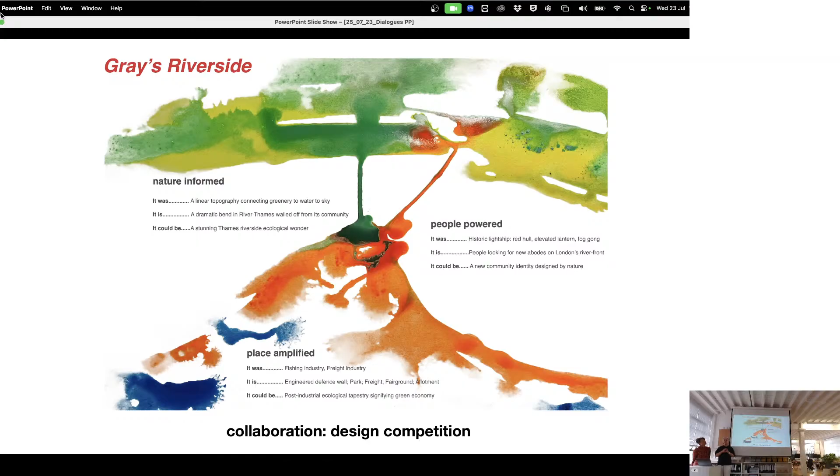And so we've rewritten the book many years later, after teaching at the AA. The book got us a job teaching at the AA, and there we were exploring nature very directly with the students and looking for stories. We share this process with a lot of people we do collaborations with, and I think they really enjoy using the process because it brings facets out of projects by looking at nature, people and place.

Thank you, Simon, for having us. So in this book, aside from the process which Mike described, we also added 5 case studies to demonstrate how that process works. So as Simon said, it's very, very difficult to rationalize a process. And in this book, it looks maybe a little bit neat, but the reality of it is actually much more organic, and there are a lot of U-turns.

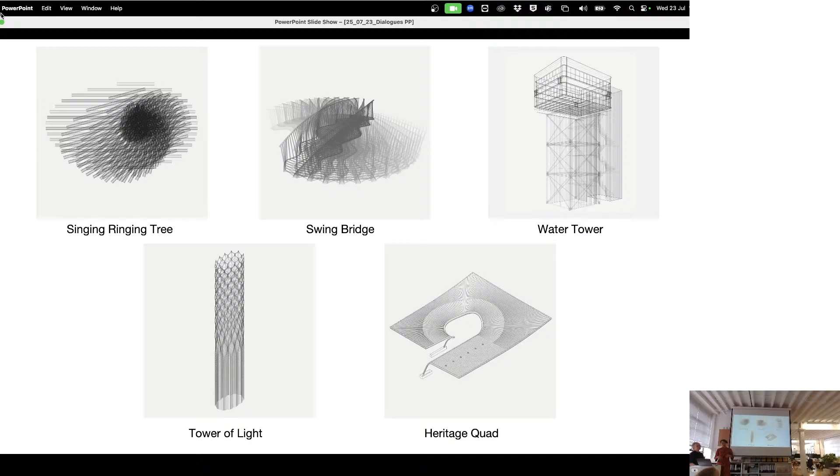And I suppose part of the motivation for doing this book is we feel architecture's really going through a very difficult patch right now with the convergence of challenges on many fronts, and sometimes we're all quite inhibited in almost a culture of fear, but also we all have architectural prejudices, and it's very difficult to think outside of our own limitations, and we almost forget architecture is an incredibly holistic and powerful tool for innovation.

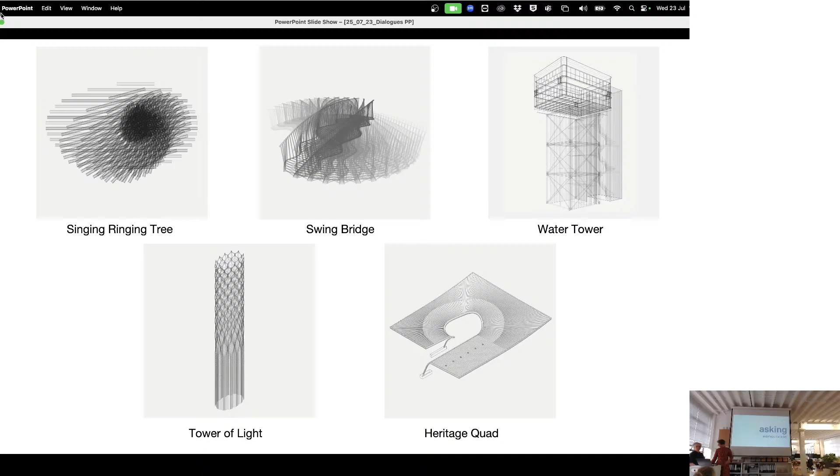So we want to use this opportunity to rethink the three facets of nature, people, place from first principles. And I hope we can show you how that works. So to show the process, hi Tony.

There's a seat here. So the first project is Singing Ringing Tree, but I'm going to show you the diagrams that demonstrate the beginning process, which is asking. So the site was disparagingly described to us as nothing but wind. And in the beginning, the first stage, asking, is all about words.

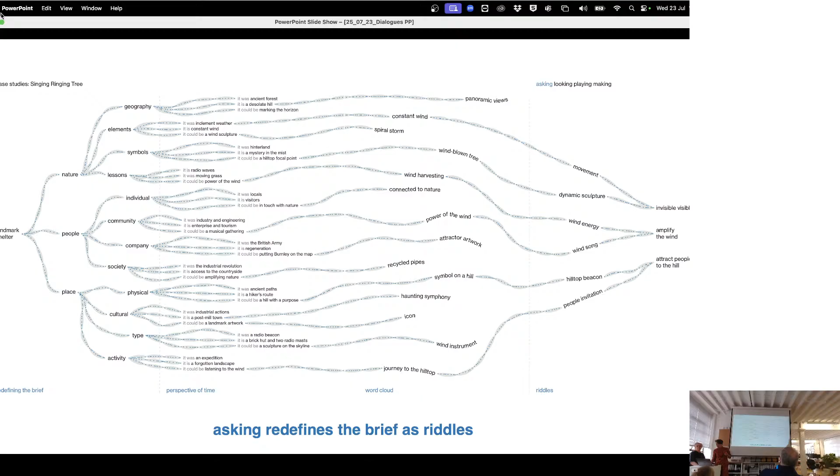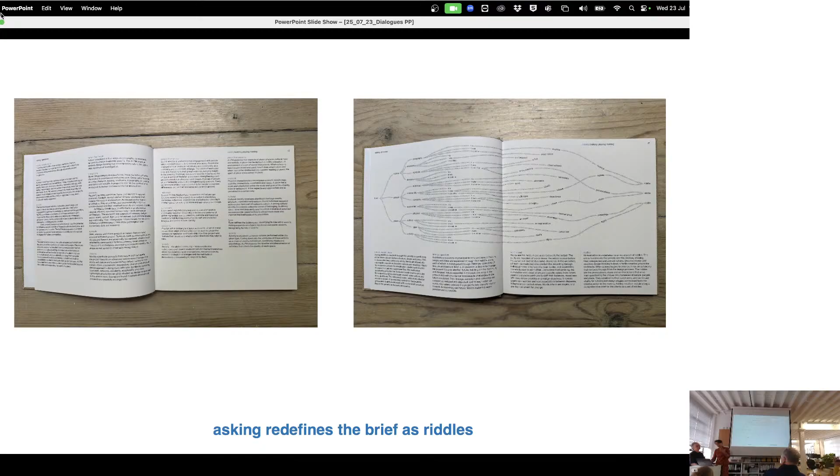We don't use images, we resist sketching, because chances are when you start drawing, it's what you know already or what you're very familiar with. And we all get into habits of what we want to do. So we use words, and it's almost like a kind of word association game. And the main aim is to redefine the brief as a set of riddles. And I'll explain what these storytelling tools do to this process.

So the brief is expanded in three pillars of nature, people, place. And then within each pillar, it's expanded in four ways. So for example, nature, we often see it as one scale or another. Here, we're looking at, in terms of geography, the natural setting of a place, the site, and the clues from everything that's non-human on the site, the geology and the biodiversity and so on.

The second scale is elements, so rain, sun, and wind. So increasingly we use them as resources, but they also can be integral to our design as a sort of animator. We all are familiar with the idea of using light, but rain and wind and other senses like sound and smell and touch can also be embedded into architecture. So we very deliberately think of what are the elements that we should look at.

And then symbols. I think it's a very natural instinct to connect to nature through symbols, through so many fables and stories. It is something that we found with our projects helps to unify the communities that we're working for, and it gives them a kind of new identity, and I don't think anyone argues with nature. They're rather universal, but they could also become incredibly specific and local. And so that's the beauty of symbols that come from nature.

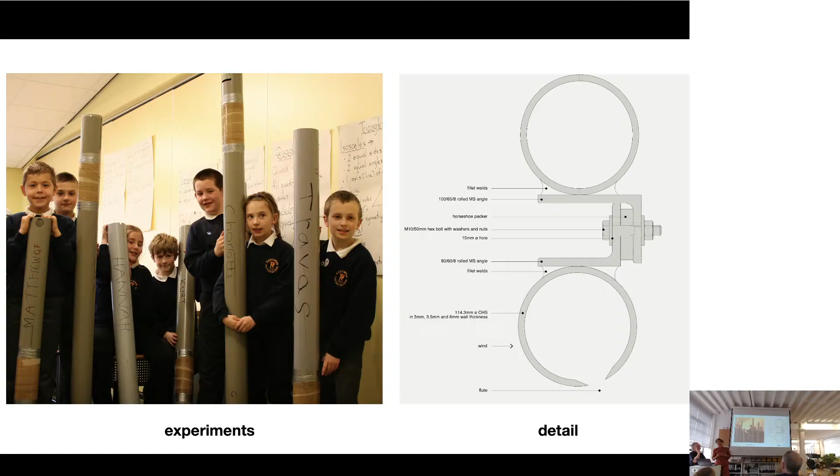So how to turn something that's really kind of despised or disliked into something different and transformative. So it's become, I think, a bit of an identity for Burnley on the top of the hill. And at one point, I remember, it went on pause for a long time. So what's not evident in the diagram in the book is that there was a long pause where the clients weren't sure they wanted to progress and so on.

And in the end, they came back and said, well, we did a flag flying contest and decided that it needed to be visible from the Sainsbury's car park in Burnley. To get the money off Sainsbury's. Is that a possibility? We said, oh, okay. So we knocked down a radio mast shed and propped it up on the rubble of that demolition, and managed to achieve it without building more of a sculpture.

And it's become adopted by the area. Our job was, as I said in the brief, to put Burnley on the map, and then the singing tree was put on the map as well. I think what's interesting, I feel it's almost implicit in every brief that a place needing regeneration or cohesion wants to be put on the map, in whatever measure. And whether you're Grosvenor Estate or a tiny village in the north of England, I think everyone wants to have a sort of voice and place on the world stage.

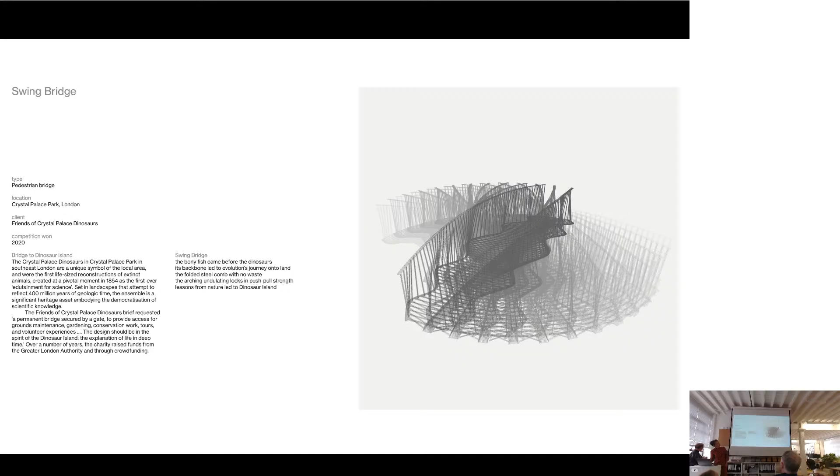So the second stage is looking. It's always where we set the architectural intent. And we're going to show the process through this project, Swing Bridge in Crystal Palace Park. The client body is a local group, The Friends of Crystal Palace Dinosaurs. So they kept saying, we need a bridge, because the dinosaurs are falling apart. These are astonishingly grade 1 listed structures that are falling apart, and no one really understood, or at least I didn't in the beginning, the significance of this.

So this is what it looks like in our office when we do the brainstorming. So the looking stage is now more kind of visually based. So we will look at graphs, for instance, with symmetry, wind data and so on. But here, looking at similar territories, and then we put them on the wall along with the words from asking, and we try to make connections and threads that lead us to a place we call the quest, which in a way is the architectural intent.

So here we took the riddles and then expanded it again through the perspectives of others. So in this case, through nature, people, place, but within each one, this could obviously be swapped with other types of specialists. If we didn't have a mythologist, for instance, in our team, we would role play. We would think as a mythologist would, or anthropologist, almost using other disciplines' tools to analyze the situation, to expand. And what we're looking for is a sort of unique and universal design intent.

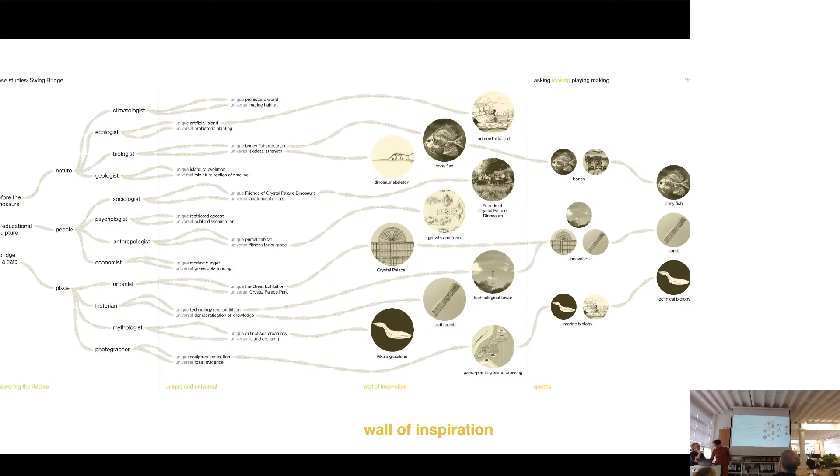So in this case, it's about a mixture of economy and communicating what this place was. So we learned that the dinosaur islands were laid out in geological time. So even in the way they created the islands and planted it, it was sort of the first example of edutainment, which means educational entertainment.

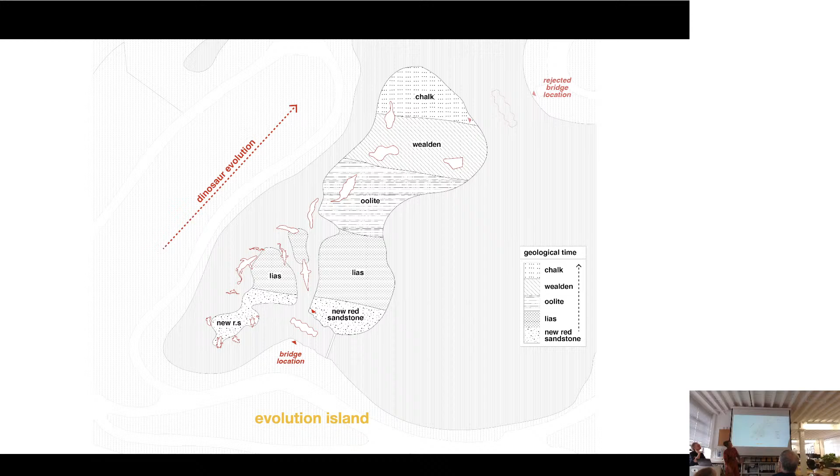So the Victorians wanted very much for physical things to communicate certain knowledge, and so planting, geology, and then those dinosaurs to teach people about evolutionary time. So we had a choice of two sites, and we chose this one because it was the beginning of time, it was before dinosaurs. And that gave us the clue to look at bony fish, and also the process of design we equated to a kind of evolution and adaptation.

And in this modeling of this quite short span bridge, maybe about 10 meters, we looked at different undulations to see what was the most optimal. So we tested many iterations to find what was the best visual and structural result. So this gave you a certain performance. We learned from how creatures move through the water in a very efficient way, and when the forces behave this way, you can make the plates super thin.

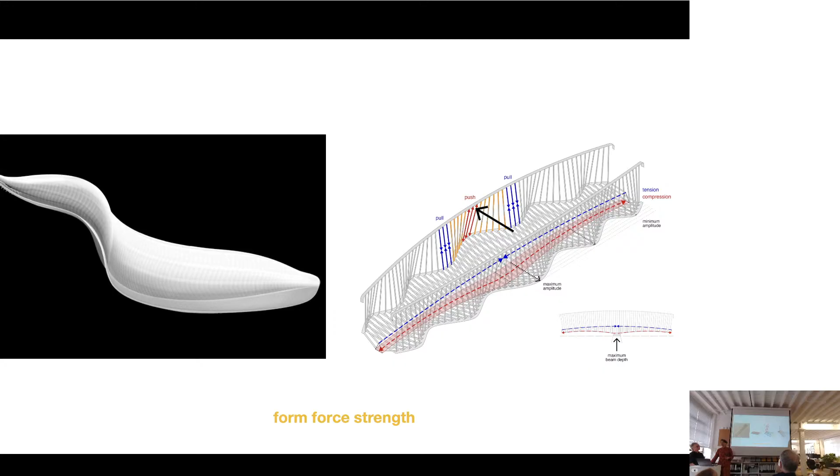In the back of our mind, always there was economy in place, because the group was raising money from the mayor's funding and also from their local community. So how are we going to make it really cheaply? We invented this method, which is taking one sheet of metal and laser cutting it, and bending one up to form the balustrade, keeping one straight to form the deck, and one going down to join the torsion beam. And that was a very material efficient and financially efficient way of making this.

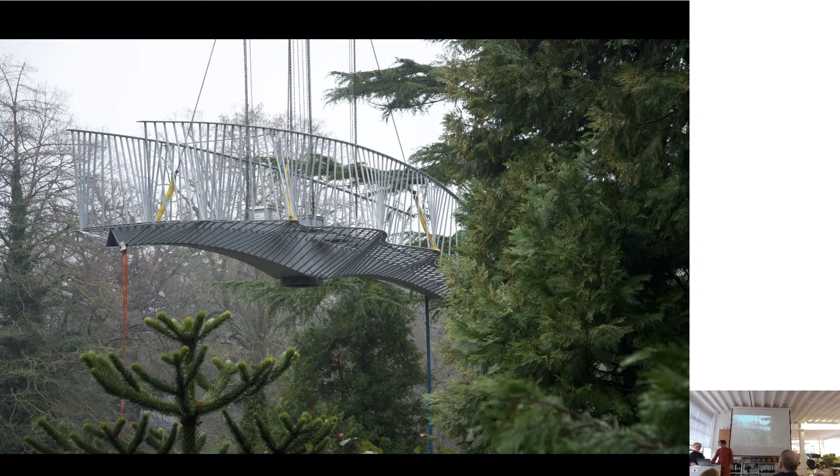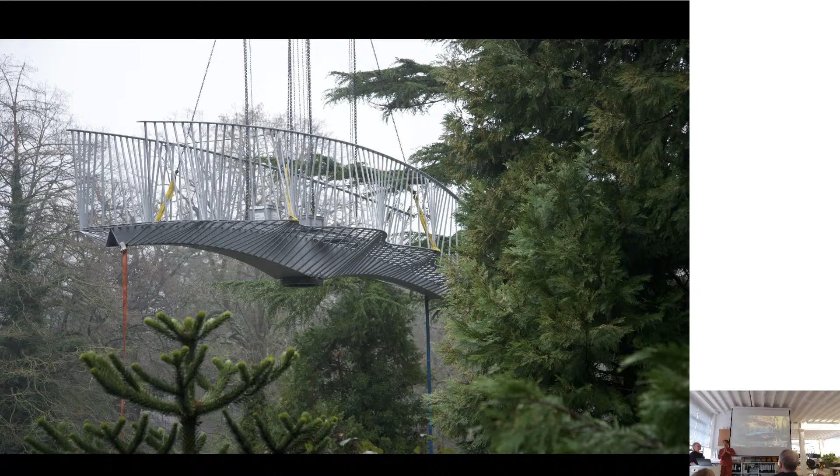So the third riddle to mention about this bridge is that it had to be a bridge, but also be a gate at some point, because they didn't want access to the islands all the time. So we tested a lot of alternatives, putting gates or lockable and even quite wild options, platforms that break up and become inaccessible. And the most simple option we came up with was this idea of the pivoting bridge. So normally it's parallel to the bank when not in use, and when needed, it's just a chain in the water and you just pull it across, like so.

So I'm going to hand you over to Mike, who's going to take you through playing and making, and through 3 projects, some of which you might have seen. So when we're playing, we're taking those quests. The quests are always varied, and they always give us a series of quests. So we're never chasing one thing, we're always chasing several things. So I'm going to show you that process in the case of the Tower of Light.

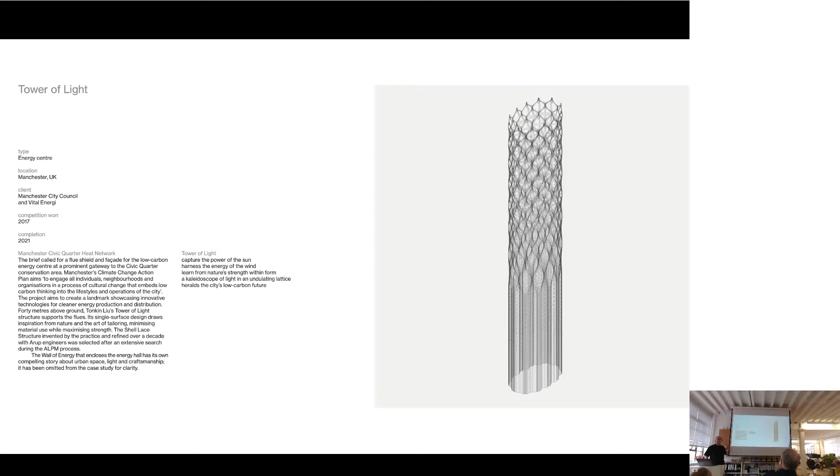So the Tower of Light is a flue to an energy centre in Manchester, but that flue is at the gateway to the Civic Quarter in Manchester, and so they wanted it to be a landmark. So I'm going to show you how we won the competition and how we got there. So the 3 quests we had were, we wanted to capture the natural energy of the rotation of the Earth, because we said that all energy on Earth is involved in rotation. The rotation of the planet gives us the winds, and the changing of the seasons, and the changing of the day. And in the man-made world, rotation gives us all our engines and our wheels. So rotation and energy are very much interlinked.

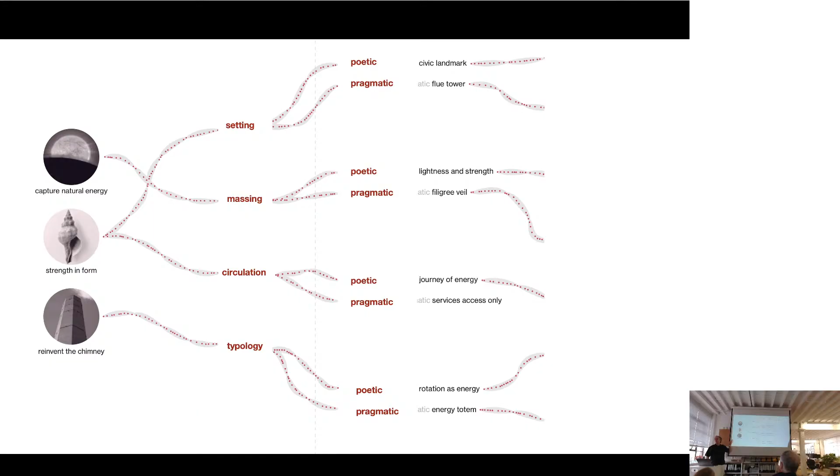We have a preference for strength in form, so we're very concerned by making things that have strength embodied in the way they're made and the form they have, so that they're completely efficient. As you saw in the swing bridge, where actually you couldn't change anything without it becoming less efficient. And then the other thing was, Manchester was a city of chimneys, and actually our job was to reinvent the chimney, basically. So we take those quests and we start to play, and we take each of these things, a setting, a mass, circulation and typology, and we balance between the poetic and the pragmatic.

And this kind of comes back to what we were saying 25 years ago. It's always a balance between poetic and pragmatic. And in the office, we always make models. We make lots and lots of models. So everyone's sitting around the table, it's done communally. And then those models get improved until they kind of go into Rhino.

When they go into Rhino, then we start to kind of amalgamate things, and things get selected, and we start to narrow it down. And eventually a kind of winner, they're called quests because there has to be a kind of defeat, and there has to be a kind of a victory. And the victory is the one that makes the most sense financially, artistically, and becomes an archetype, because basically we're looking for a symbol. We're looking for something that symbolises what the project's about, and we're not afraid for it to be a symbol. It's not a sign, it's a symbol.

So we get to the end, and we get an archetype. And in this case, it was the idea that we were going to make a kind of totem of energy. So to start with, this tower, it rises 40 metres off the floor, and when we went into the process, it was only 4 millimetres thick, and it has no other structure. So it's an incredibly strong structure, and that's because we learn from nature.

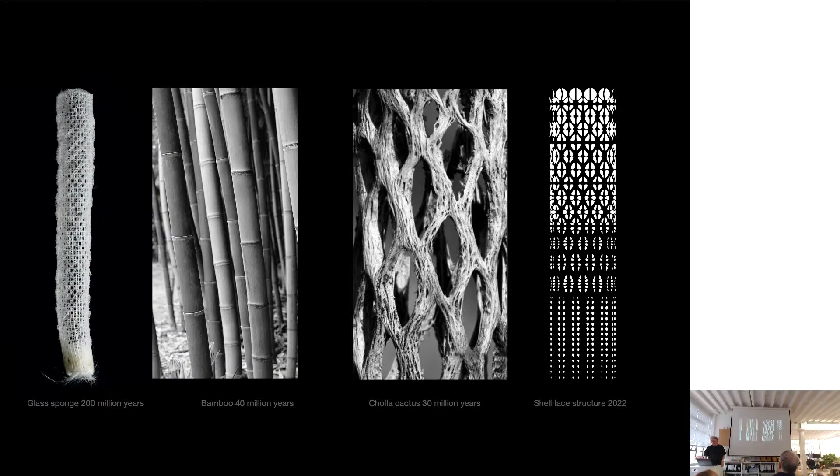A cactus in the desert is really interesting because it points at the sun, because cactuses are generally on the equator, so the cactus can get as big as it can because it just points directly at the sun, so it stays very, very cool, and this structure helps it do that. I mean, shell lace structure, well, that's something we invented in 2009. But we didn't think of using that straight away, to be honest.

We explored all sorts of things, and like Anna said, it's a kind of messy process, but we get a series of design alternatives, and we're quite serious about chasing each one. We were really looking at rotation and how we could get rotation into a system, but actually the one that was most successful was the one where we put rotation into a surface and we made a single surface structure.

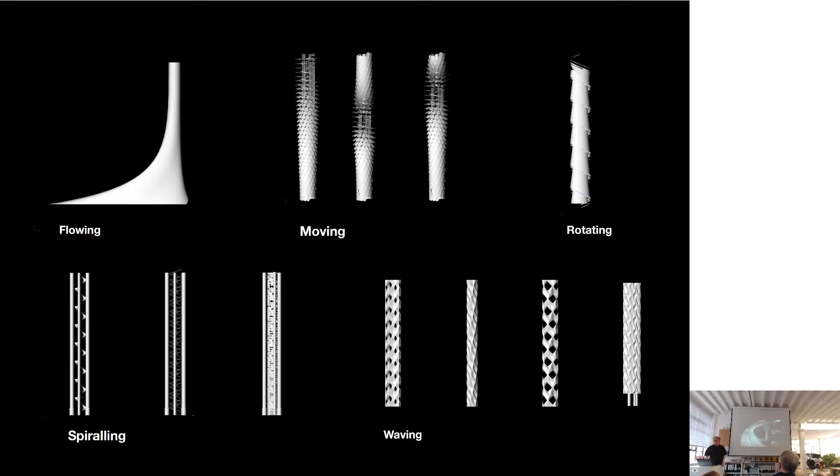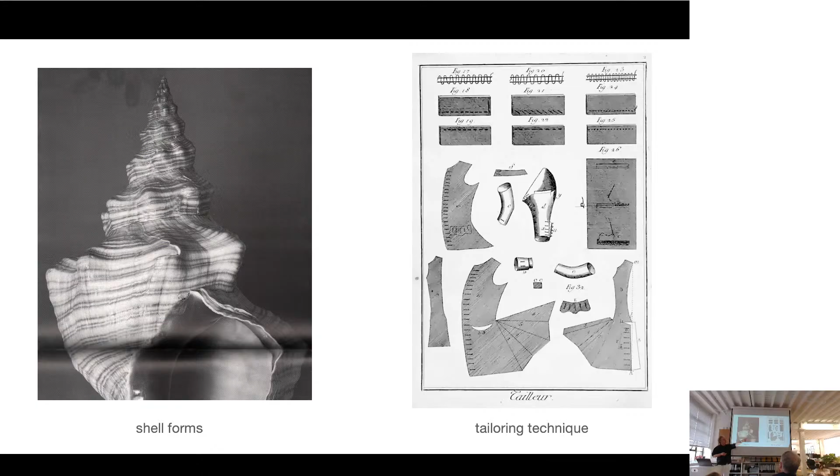So shell lace was something we'd kind of developed, as I said, at an exhibition at the RIBA, and it had its own kind of evolution, including the stent and other competitions we'd won. It has an efficiency to it because it has great strength in form, because when you tailor single surfaces and join them back together again, you lock in the strength.

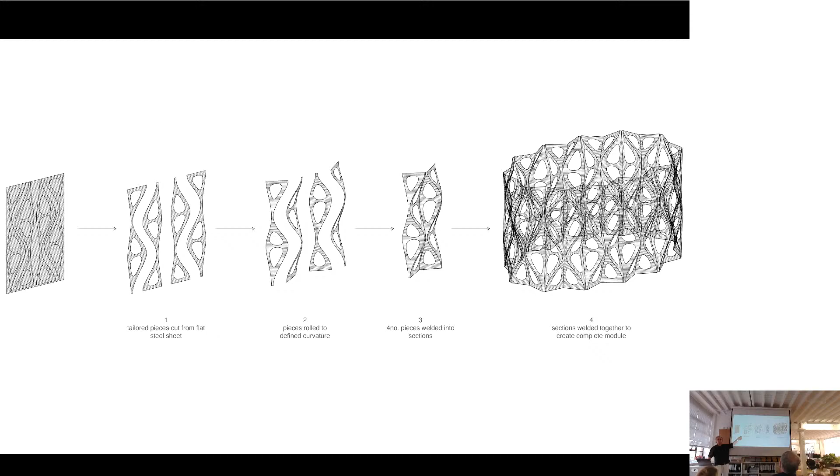So you take a sheet, you cut the sheet, you bend the sheet, and you weld it together. And when you weld them together, they can only go in one place, and once they're there, because they have other surfaces next to them, they can't move. So the strength is locked into the surface, and that's how we could get it down as thin as 4 millimeters.

And then we welded them together into a drum, and then the drum had all of the paraphernalia that was needed. So mirror polished stainless steel drums, and then all of this kind of made up a diaphragm, and at the bottom of these are gold stainless steel reflectors that are 2 millimeters. They're about the size of this, and they move in the wind. So when the wind blows, the light reflects off them, and you'll see how that works in a minute.

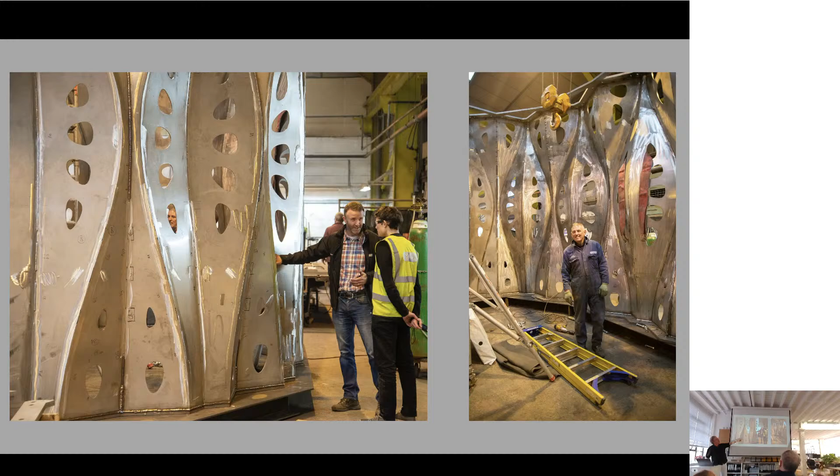So these are the drums being built. That's young Chris, who was the engineer from Arup, Chris Clark, and these two guys did the welding, and funnily enough, they're both called Phil. And this is the workshop, and I actually didn't see that. That was a picture taken by the contractor and sent to us before they went off to painting.

But you can see how they're sort of components, and the components get lighter as they go up, because as it rises, the wind speed increases, and as the wind speed increases, the bigger you make the perforation, the less the structural role, it makes more sense. You take more of the structure away, and it makes the structure lighter.

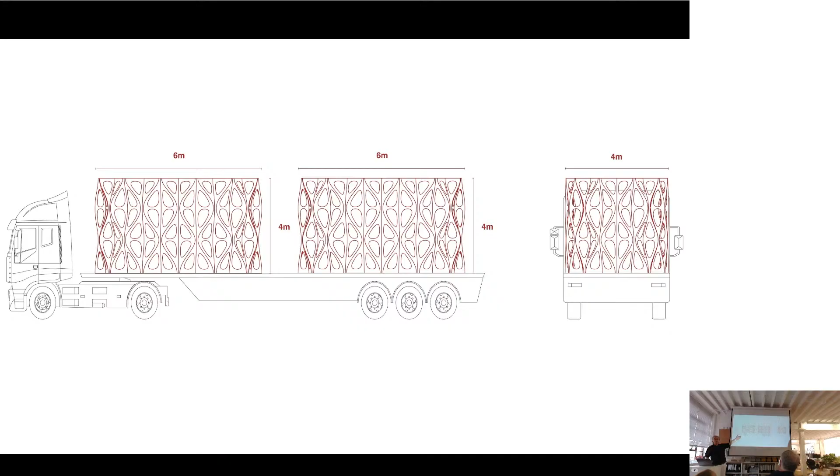In essence, the drums are put onto a lorry, and we designed it so that you could get 2 drums onto one lorry, and it was still fitted within the kind of design that meant you didn't have to have road closures. You'll see how a rotation works later.

When we won the competition, they then said, that's great, but we want you to do the same thing for the energy centre itself. So, in a rare case, they doubled the budget and gave us more money to do the base of the energy centre, and they said, we want you to make a statement about energy here. So here we talked about the energy of the land, not the energy of the sky, and we showed them pictures of...

What are they called, Camber Sands, where the wind and the waves have made these beautiful patterns of energy left imprinted in the sand, and we tried to kind of replicate that.

The stainless steel top drum was built by a company in Bolton called Shulton's, and we wanted this to be built locally, so we went directly to Darwen Terracotta, and Darwen Terracotta told us something quite interesting. They said that company started by making Belfast sinks, and they said, if you make it the size of a Belfast sink, you'll pay less money for putting it onto the wall. If you make it the weight of a Belfast sink, 2 men can carry it, and actually that's the optimum material. And if you make it the colour of a Belfast sink, that's the cheapest glaze.

So with those things, and they told us one more fact: if you've used the mould 25 times, the mould's finished, and you need to make a remould. We said, well, can the mould change? And they said, you can change the mould as many times as you like, as long as we can use it 25 times. So we took that amount, and there were 1,300 tiles, and we divided it around the height.

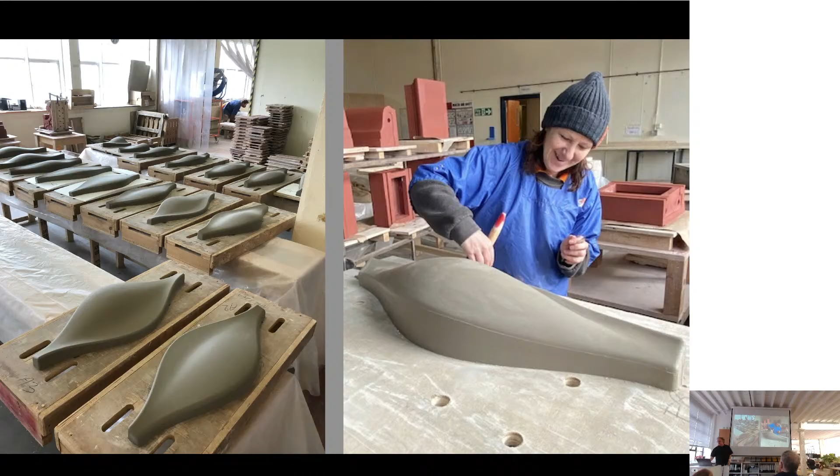So that actually we could make the tiles undulate. What we could actually do was bring that sort of Camber Sands undulation into the changing profile of the sand. So each one is made in a slip cast. They're then finished by hand, and then they get glazed, and then they end up on the wall.

In Pride we also change it so it's in different colours, and for the Heart Foundation we change it red. And we didn't want them to change it whether Manchester City or Manchester United had won - we said that was off the cards. It would have been blue most of the time.

So, making - I'm going to show you the water tower just because it's a kind of nitty-gritty project in a historical setting. Castle Acre is a really fascinating village. It's quite small, but it has 3 ruins: a Norman castle, the best one in Britain, a priory which is actually really beautiful, and a bailey gate through which you enter the village - quite a rare thing to survive.

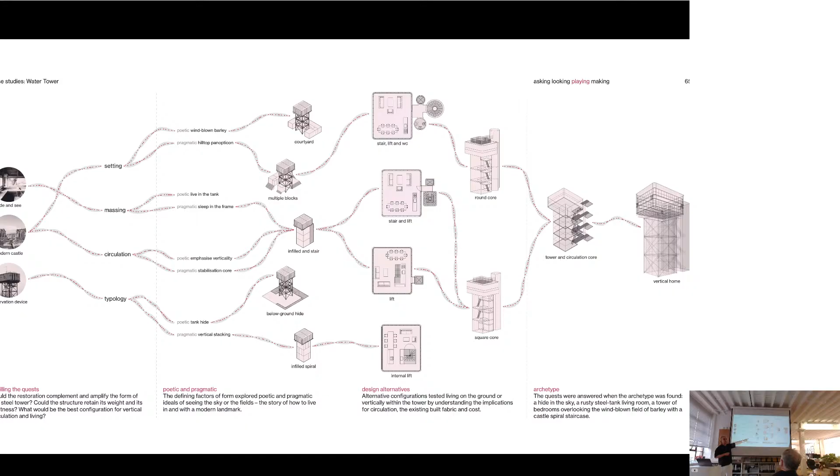So here's the process. I won't go into it too much, but you can see we do the poetic and pragmatic, and we did a whole series of alternatives, and it gave a series of variants until we arrive on one, and actually have to go to the QS and persuade Dennis he needs to spend a little bit more money, because otherwise he has to go for some of these other options he didn't really want. And actually it made the most sense, because we kind of maximise the structure.

And then when it comes to making, we take those first 4, setting, mass, circulation and typology. I'll explain that a little bit more with the York project. And then after that we go through structure, service, enclosure and apertures. And each one of those can be different in a building. And by separating the building out into those fundamental components, you can make a kind of an artistic agenda for each part of a building separately. And I'm going to explain that a bit more carefully here.

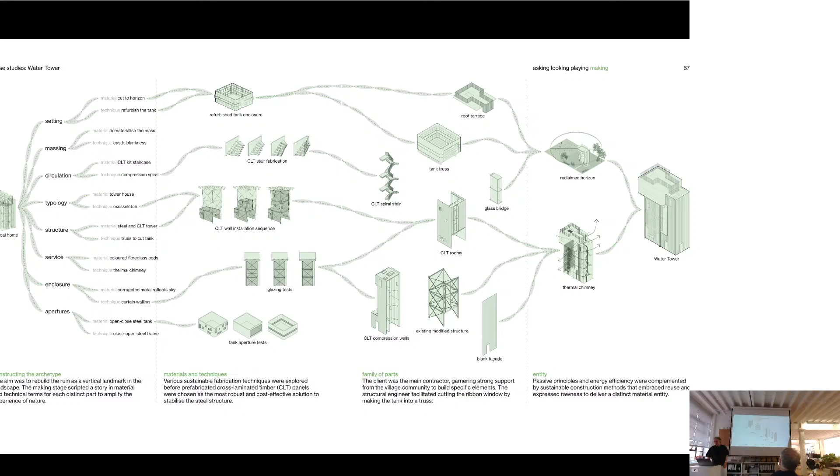So here we are, kind of family of parts. So we had the tank, the frame, the bridge and the stair. And I'm going to explain how each one, in our aim, was to take you closer to nature. So the tank was always full of water. So we said, let's make a horizontal cut.

Dennis wanted to cut huge windows in the side like everybody in a water tower does. And we said, no, don't do that, that's too Kevin McCloud. So let's just make a slit. And let's just make the slit so when you sit down you see the view, and when you stand up you see the view. And what you'll do is you'll just bring the horizon completely into the tank. And actually that was a much better thing to do.

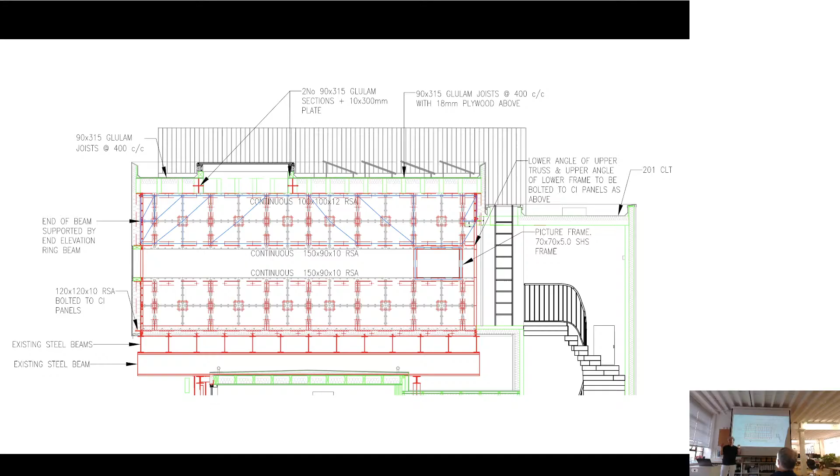And we did that with the help of Mervyn Rodriguez, who was a brilliant engineer, and he said we could do it by turning the skin that was already there into a truss, just by putting a frame on the outside of it, and by using the window frames that were next to the Velfac windows to bear the structural load. So a minimal structure.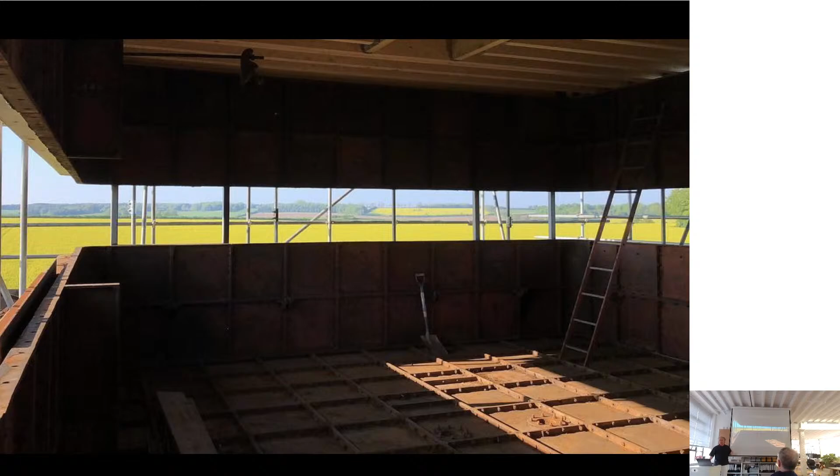So Dennis and his son, which son's that? Not sure. Harry, I think. Well, Harry, that's it, yeah. So with a sledgehammer in the morning, they undid the bolts and they knocked out the first panel. And by the evening, they'd gone all the way around with a sledgehammer and knocked all the panels out. And Dennis said it was a very satisfying day, absolutely exhausted. But in doing so, they revealed the horizon. And that was the intent.

What I pointed out to him is that actually once you make a slit like this, it's very easy for you to get glare unless you bring some light into the middle. So we persuaded them that we needed to have a skylight because that got cut out of the budget and we had to put it back in, otherwise the light wouldn't be even. And what we did is we surrounded that skylight by mirrors on 4 sides, so that it doesn't matter where the sun is, the sun would always enter the space. And then we put a flat glass skylight on the top of it.

And then Dennis made this film. This is the sky moving past, slightly speeded up in the mirrors that surround it. And at night there's a light around that as well. So that balances out the light in the space. And what happens when the sun moves around the building is that light's constantly changing. And when it rains, the water lands on top of it and the light comes through the water, and you get these water patterns that move throughout the building too.

So environmentally, you can see that this is a separate environmental zone here. We couldn't go into this structure here. So this is environmentally one zone and this is another zone. So I'm going to tell you how the tank works.

So the frame is incredibly slender. These are only 150 by 150s. They're steel. We had to fireproof them, and then we put the plan inside them. So we put a bedroom on each floor, and a bathroom and a bit of a wardrobe space, and on top of that a mezzanine because they were like cube-like spaces, and then at the back we put the staircase.

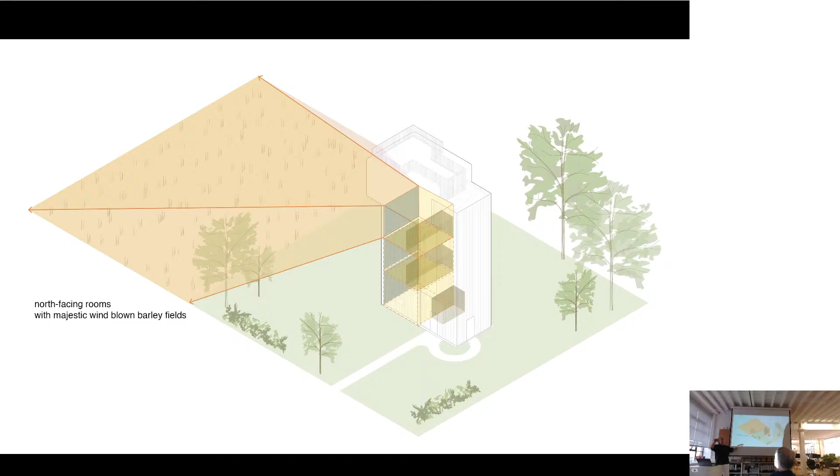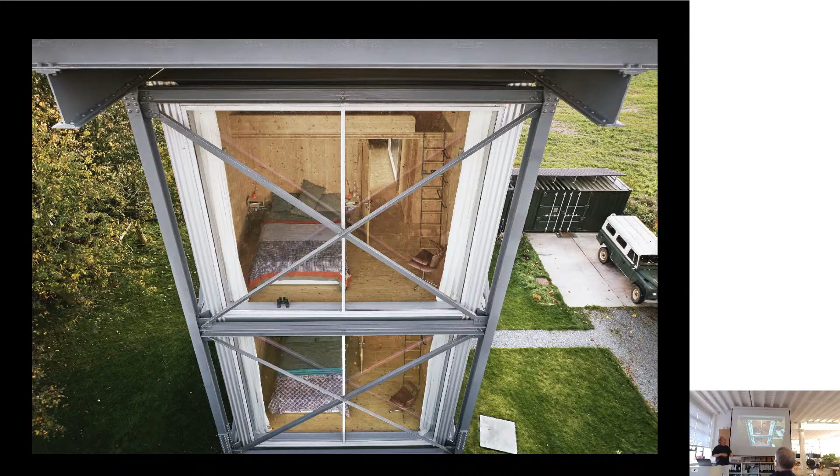So we made the rooms barley coloured by making them out of CLT, so you're in these CLT rooms that look out onto the barley coloured landscape. And that's what it looks like at night - the light pollution goes just into the field, and the village is kind of behind it. And this is what the rooms are like.

There's a low level window on one side and a high level window on the other. In the morning, the high level window makes a square sun on this side as the sun rises, and it moves across the room while you're looking out onto the barley field.

The skin isn't galvanised wriggly tin, it's zinc anodised wriggly tin, and it doesn't go dull - it stays super shiny, so the building reflects whatever the light conditions are. We planted Boston ivy on it, so eventually this building will become like the ruins down in Castle Acre, kind of going back into the landscape. And there it is reflecting the sun.

Dennis said he was called one night by someone who thought the tower was on fire, because it was reflecting back the red of the sunset, and then they realised it was just reflecting the light. Maybe the most important thing is the stair.

Anna and I have travelled a lot, and one of the places we travelled was Yemen. There, the stairs are always used as kind of thermal chimneys, which is how they keep those 8-storey buildings cool. So we used the stair here as a thermal chimney, with very little openings in it, letting in 2 doors at the bottom for cold air, which can flush the air out of the rooms as it rises, by keeping the ceilings high.

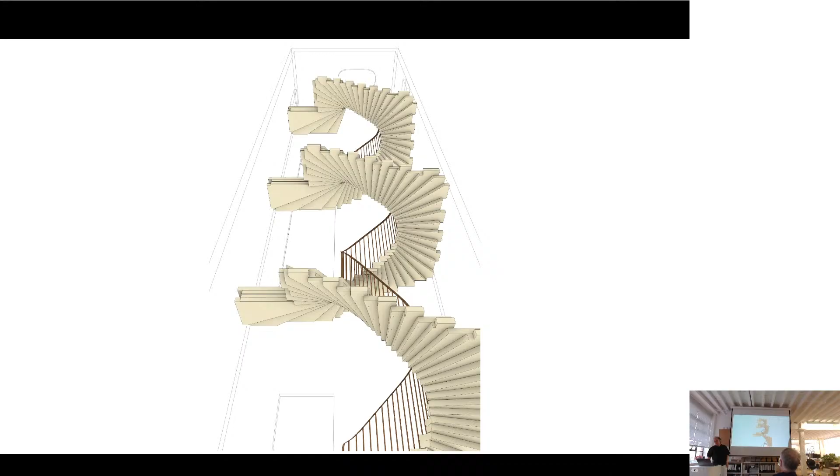Each tread is made out of 2 pieces of timber, locked into the walls as it goes round - a bit like a Robert Adam stair. It's a compression spiral, and because there are 2 steps at the bottom, you get that kind of curve coming all the way up. Those pieces were offcuts from the rest of the build.

The pieces of timber cost £3,500, and Dennis built this project. Again, we like to do things locally - nearly everybody who built this, he met in the pub. This is Ben and his dad Nigel, who built the stair - they started Monday morning and finished by Thursday evening, and that cost £3,500 as well. So for £7,000 total, we built the 3 flights it took to get to the top - an incredibly cost-effective way.

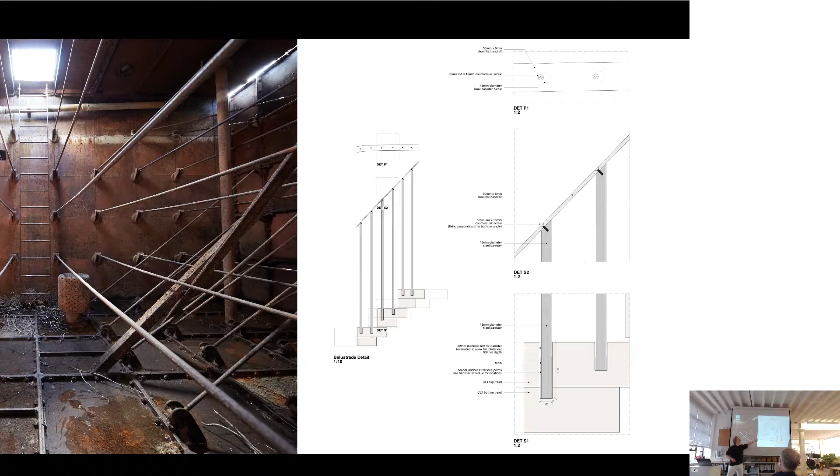And we reused these rods to be the balusters, and because we had loads of them, we put one on each tread, so that when the stair goes round the corner, it's like a kind of harp. It speeds up and it slows down again, and then it has a kind of a handrail like a comprehensive school.

So this is the view from the distance. You see all the way through the building, and that's Dennis and Missia in the room. So you can see here we kind of told a story about the water tower, and we made a story that's very particular to Dennis being a photographer, and each one of those spaces has tried to make a different relationship with nature. So that's what's important to us. And actually, as a practice, I'd say bringing people closer to nature is our main goal.

So I'm going to show you the last project, where I'm going to show you the playing and the making, and I'm going to break it down a little bit more. So this was a competition to provide a workshop, apprentice accommodation, and an administrative headquarters for the stonemasons in York. It's called the Centre of Excellence, and the intention was to speed up the repair of the cathedral by 4 decades within a century. So it uses high-tech equipment and ancient craft skills.

And we won the competition, which is this building up here, which is next to the city wall. And as a consolation prize, we got this building, which is a super high-tech shed, where all the really high-tech saws are. I'm not going to show you both, because it would take a little bit too long, so I'm just going to show you the quad. And I'm not going to tell you the whole asking, looking, playing, making process, but I'm going to show you a little bit about York. So these pictures were taken before we did the project.

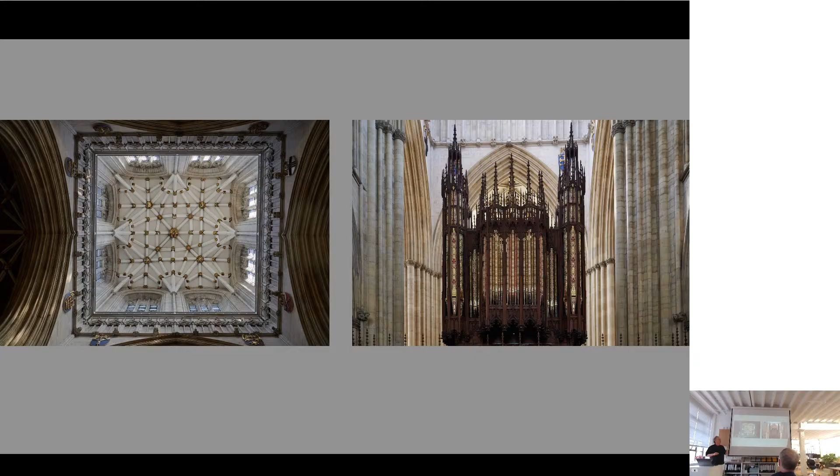When you walk into a cathedral, everybody looks up, because cathedrals are about light and geometry and structure. And so for us, we wanted it to be within that sort of cultural territory. York is a sort of vertical perpendicular, so we wanted it to be an expressed structure. So we want this structure to be expressed, and we want it to be a sort of didactic structure where you understand what you're seeing. The other competitors, it was a stonemason, so they thought they should make it out of stone. We said no, the stone is for the cathedral.

And actually, I used to work at Walcot Reclamation in Bath, and there the stonemasons worked in these beautiful timber sheds next to the river, and it felt to me like the timber building is the right thing. And York is full of timber buildings, and I think that was the right decision. And then there are a few things: if you go to any cathedral museum, you'll always find a bishop's staff, and you'll always find a monstrance. A monstrance is something that you put on the altar. They put the sacrament in at Easter time, and light emits from the sacrament.

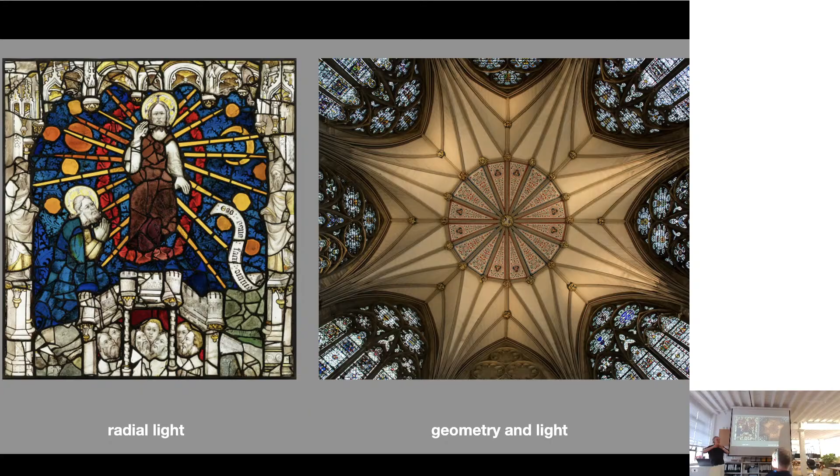And in the cathedral, this is the chapter house in York, and this is one of the stained glasses. Also, this idea of radial light as a sort of metaphor of God was something we wanted to include. So, in the book, we say how you can take the setting, and if you put the mass into it, that basically gives you the form, and then you test the form by putting the circulation into it, and when you know how you want to circulate through the form, you end up with a typology. And for us, typology is very pivotal, but typology doesn't come first. Typology is the product of the process.

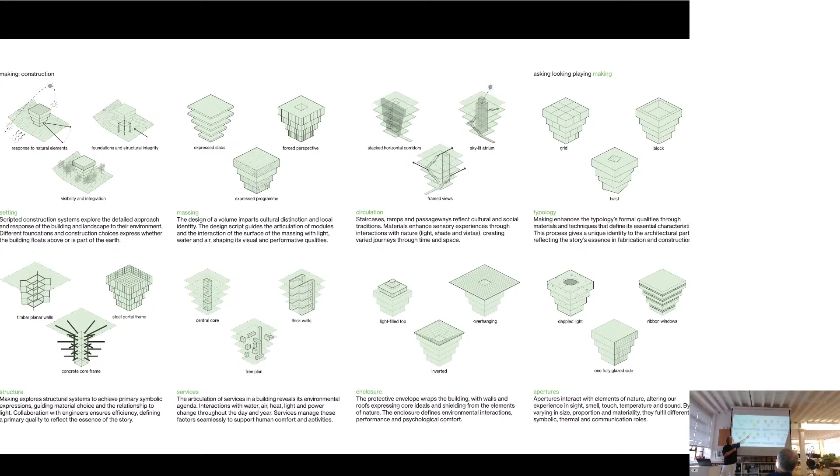Once we've got the typology, then we find the appropriate structure for the typology, and once we have the appropriate structure, then we look at a way to put the services in, and that can be in a Louis Kahn way, as thick walls, or it could be in a Corb way of a free plan, or it could be in a Mies way where you put in a core. Here we did a mixture. So I'm going to show you setting, mass and circulation, and I'm going to just run through how that works in this building. So this is the site.

It's in the Dean's garden. It's the garages that used to belong to the Dean. At the back is a city wall, the Roman city wall. 1 million people walk along the city wall every year, and that number's increasing. So they were kind of keen that somehow this building was kind of seen.

These were the existing garages here, and there was a garden here, and there's this garden wall here that goes up through the site that was seen as being important to the planners. And this is a view from the city wall back, looking at the garage buildings here. And this garden here was basically the site where the brief said, put the workshop in the garden. That was what the brief said to do.

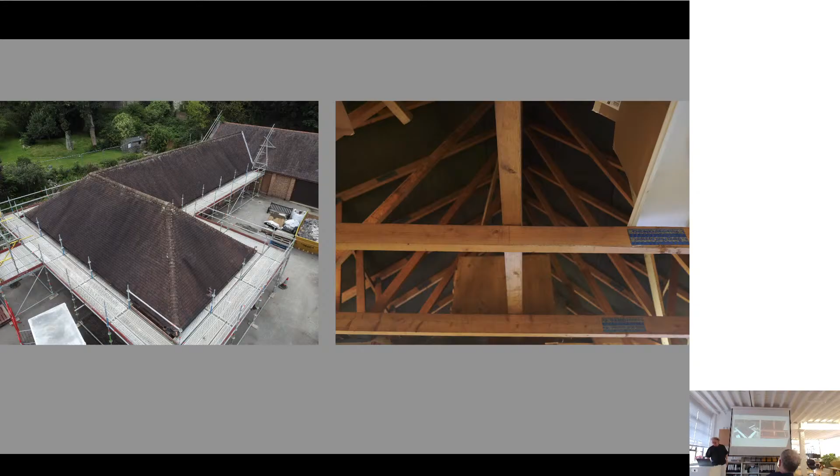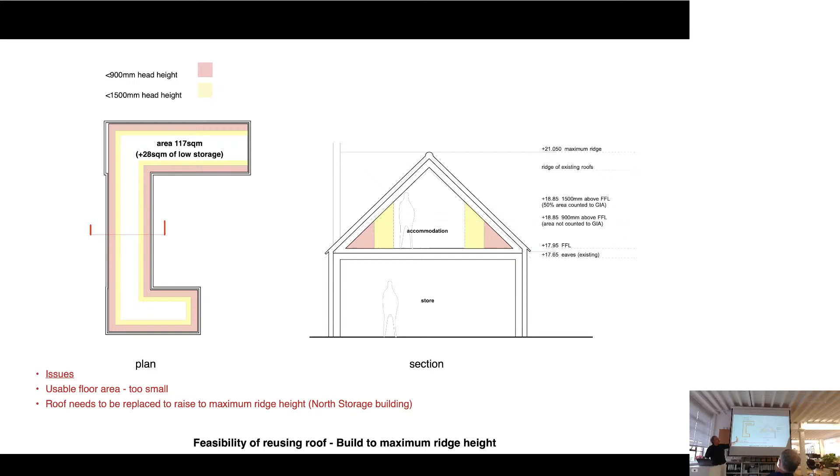The brief also said that you should put the apprentices in the attic. But we observed that it's a gang nail structure. And actually, if you put the apprentices in, there's almost no room for them, because by the time you've insulated it, the space is fairly useless. So we said that's not really a goer. So we then approached the site where we said we want to take clues from the site and use those clues in making the site here.

And our point was that actually you should put the workshop next to the city wall, and you should put the apprentices into the garden, because that way the apprentices gained some privacy, and the workshop gained greatly. It became a kind of display. That's what the city of York wanted.

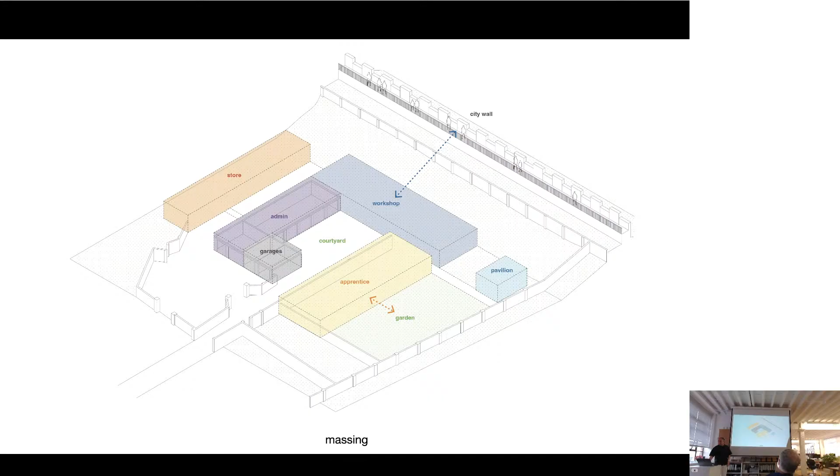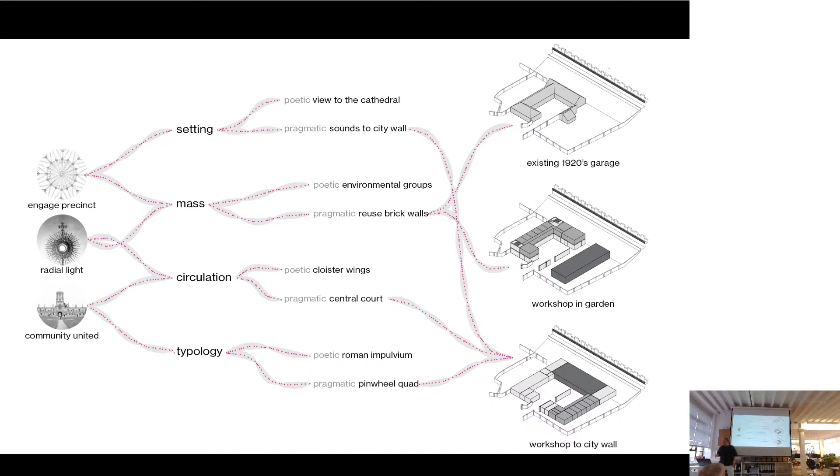So here in the book we show how our quests were to engage the precinct and work with an idea of radial light and create a kind of community. And by going through the mass setting and typology, that's what we had. This is what they said we should do, and we said this is what you should do. So we kind of broke the rules of the competition and then won it.

And we also said that actually the roof of the building should lift up towards the city wall, so that the people on the city wall could see the apprentices and the masons, and there's a sort of two-way street. And actually there's a constant queue of people just looking in now.

And we said that was really important, that there was this connection with the city wall, like with the Singing Ringing Tree too, and an experience Anna and I had in India where we heard a stonemason's yard, where they beat a drum and the masons all worked to the beating of the drum. The sound is really beautiful. So the sound of the stonemasons is quite fantastic.

But if the roof had just gone upwards like this, then the stonemasons wouldn't be able to see the minster. And we felt they should always be able to see the minster. So the building lifts up towards the minster. I'm going to show you that a little bit more in a minute.

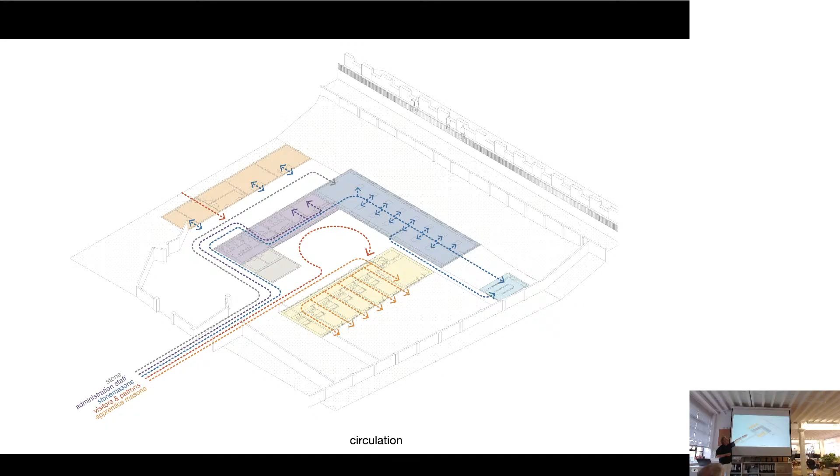For circulation, there's a long track. So like a bishop's staff, it comes up and wheels round. And then the apprentices are to one side, the workshop's at the back, the administration is here, and then we separated out the vehicles over here and all the heavy machinery and the people. So we separated, so that in the centre we could put nature.

And then the typology: the quad represents education, and in mythology it represents the earthly presence, but a circle represents spirituality and a circle represents community. So we put a circle over the square, and we did that by finding the appropriate structure. So I'm going to show you how we did that. And I mentioned lifting it up to the wall and lifting it up to the cathedral. So those two simple moves.

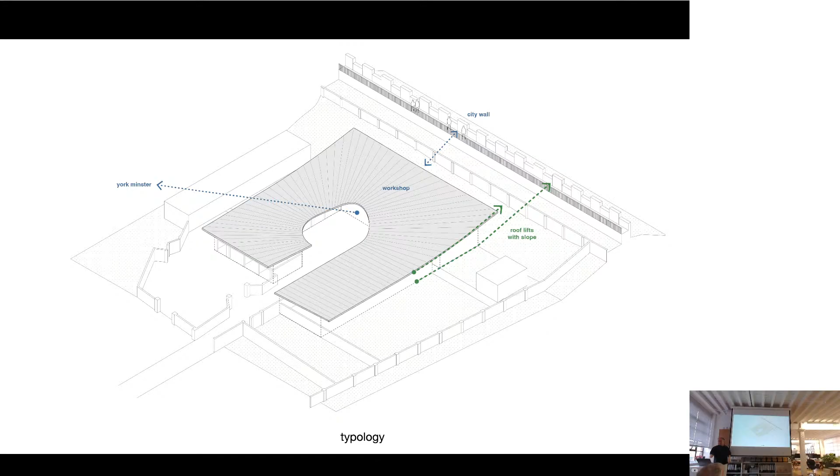So here's the journey of typology, and these are all the variants we went through when it was actually much more complicated than this. I've appreciated that in a way. And there's several months' worth of work there, and actually all sorts of crazy things that didn't happen.

And then we kind of get a building that lifts up towards the wall, and you can see how the building sort of radiates. So how did we do that? Well, we said we want to make a simple structure of a post, and a cantilevered beam that spans between the posts, and then can cantilever in to make the circle on the one side and cantilever out to protect the timber structure on the other side.

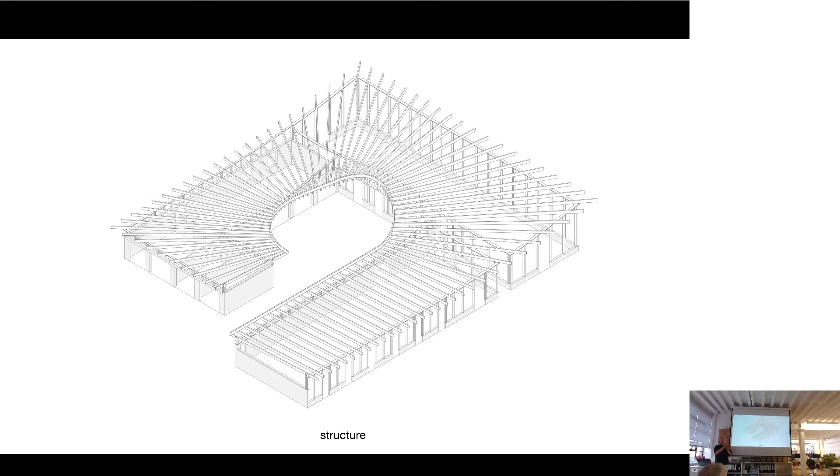So the beams are very simple, but they radiate around the plan, and that gives you the circle, and it lifts up. And it becomes a kind of hyperparaboloid just by lifting and dropping them. And so we made lots of models of how that could happen and different forms of that. And in the end, we decided the one with a straight at the end and the curve in the inside was the right one.

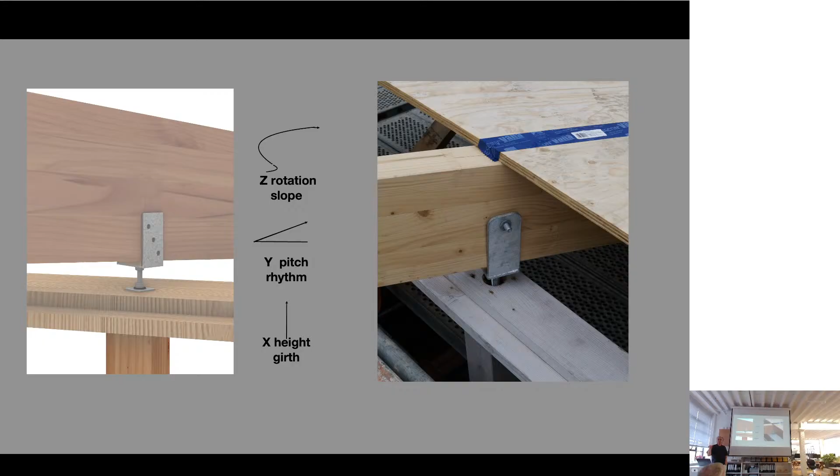And then we always have, like Anna showed you, the singing ringing tree, all of our projects, like the bent metal with the swing bridge, we always like to have one detail that actually makes it cost effective, and this is it. So you can buy on Screwfix a back bracket, and we said that the load wants to go directly into the column. And so we said if you take the load directly into the column through the bracket, it can move up and down, the bracket can swivel, and the thing in the bracket can tilt. So you get an X, Y, Z for £6.

That gives you this plan. We worked with Buckland Timber. They were great, and the roof is kind of radial all the way around, rising and falling until it gets on top of the apprentices, where it becomes simple. So it becomes very quick to do. You put the bracket in, with the crane they just drop the beam in, so they can actually do lots of them within a day. So it's a very fast and effective way of building it.

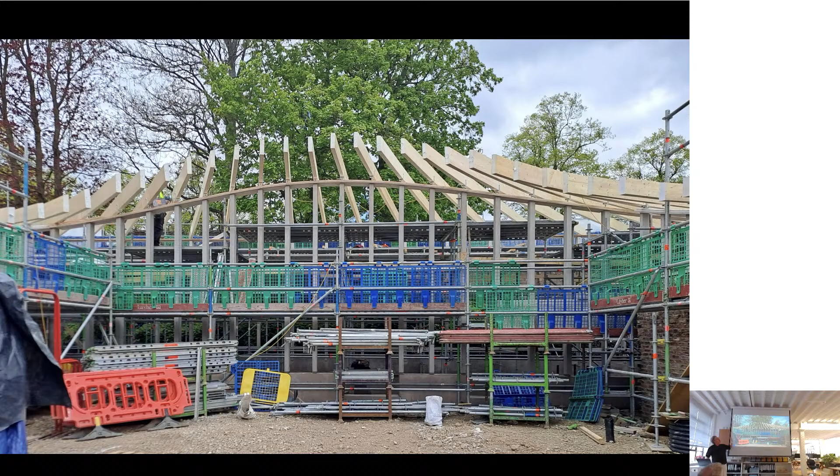So all of a sudden the form kind of appears, and then it's going over the existing structure. So this is the existing brick structure that then is stripped back, and then the loads are delivered back onto the brick structure. And you can see, I'm not going to show you that view again, but you're going to see how that roof actually undulates. So wherever you are in the building it's always undulating, it's always moving, but the beams are always pointing towards the centre, towards the courtyard and towards nature, and we put nature in the centre of the courtyard.

And as the beams pass from inside to outside, we called this a frieze, but actually it was keeping the beam warm as it passed through the thermal layer. And the ceiling plan, so as I said in the cathedral you always look up, and actually I always like a ceiling plan. I think a ceiling plan is so underrated, but in this building it was actually very, very pivotal for us.

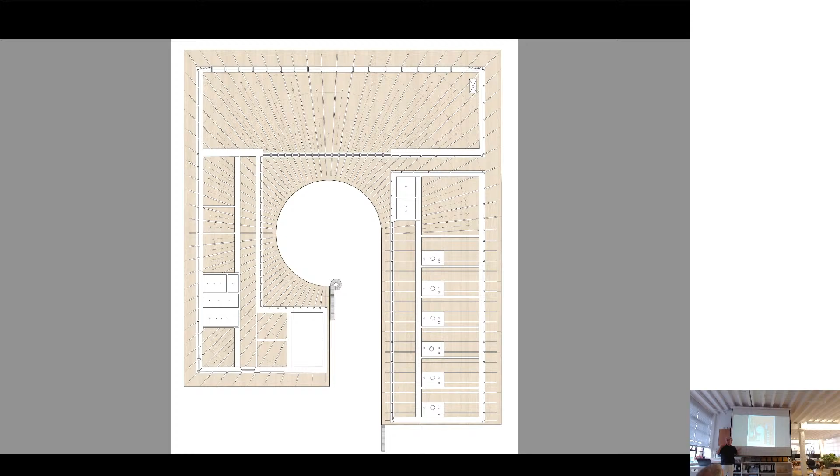So, like I said, it's a sort of Kahn notion, but here we have a kind of thick wall. So over in the admin block, there's a thick wall that deals with all the toilets for the staff behind, and here in the apprentice wing is a thick wall where all the services run within the wall. They actually run within here, not within here, but they come down here and come to there.

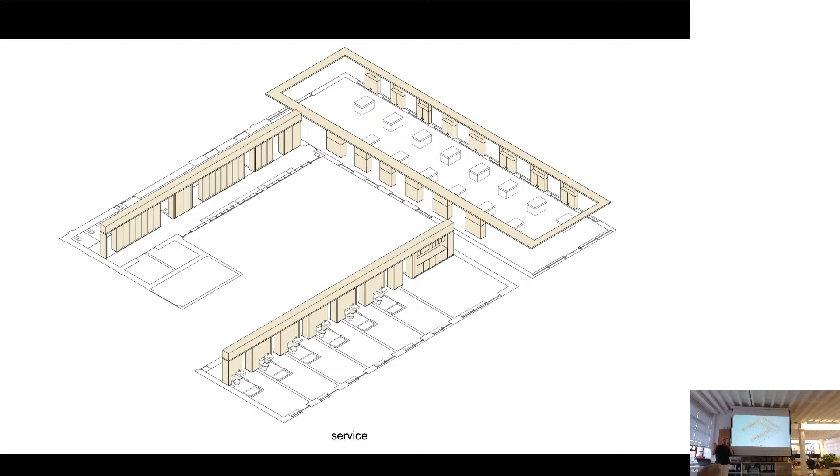And then there's the apprentice's bedroom. And then on the outside, the apprentice has a bench in his own gravel garden, and here he has a bench where he can take off his boots and leave his dusty overalls on the outside. I say his, it's mainly women at the moment, apprentices.

And at one point we had the apprentices kind of exposed like we did in the other wing, where you'll see it's all glass. And one of the apprentices, Charlie, said, actually, we don't want people to see us, we'd rather be hidden, and that's why they quite like being in the garden. So we actually left the existing garden wall where it was and let light in over the top, so a clerestory light brings the evening light into this space.

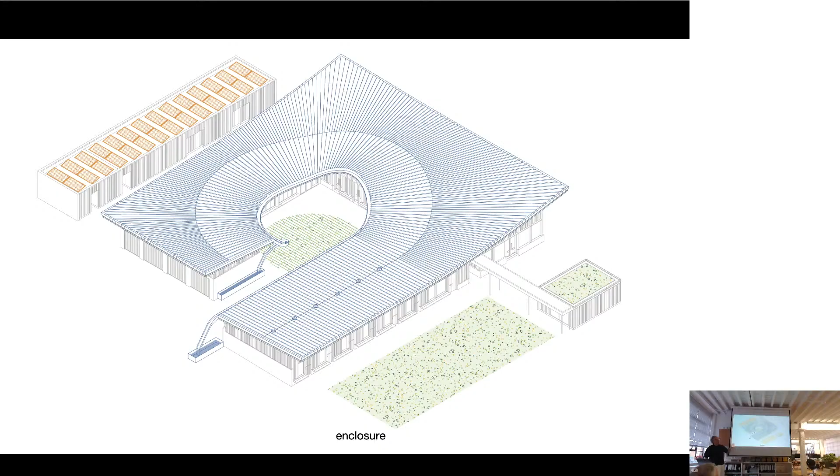On this side, the rainwater is collected simply and runs in a straight line across the apprentice rooms and down here, but on the other side where the master masons are, it comes round and does a loop underneath itself and comes into a tank. So these rainwater harvesting tanks feed the green space in the middle, which is a wildflower garden.

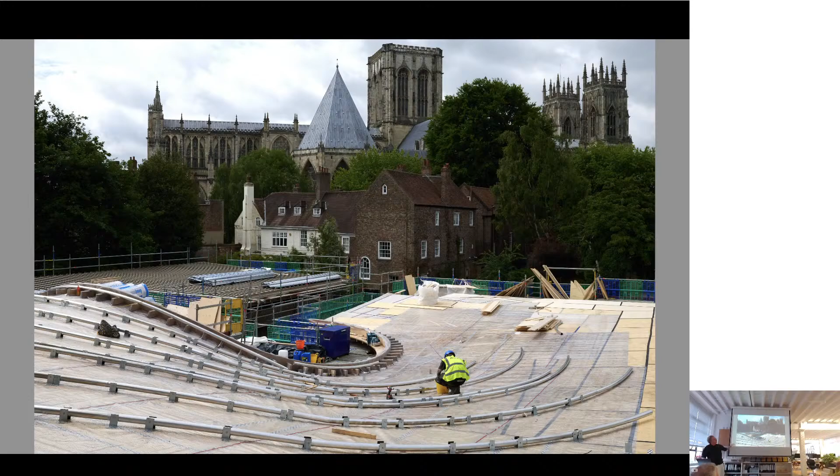So this is a standing seam roof, this is an aerial shot of the standing seam roof going in. This is how the standing seam works, so there's 300 millimetres of insulation that will fill that standing seam roof. And you can see here why this is lifted up and how you get that relationship to the cathedral. And we spent a long time choosing the right gold for the standing seam roof.

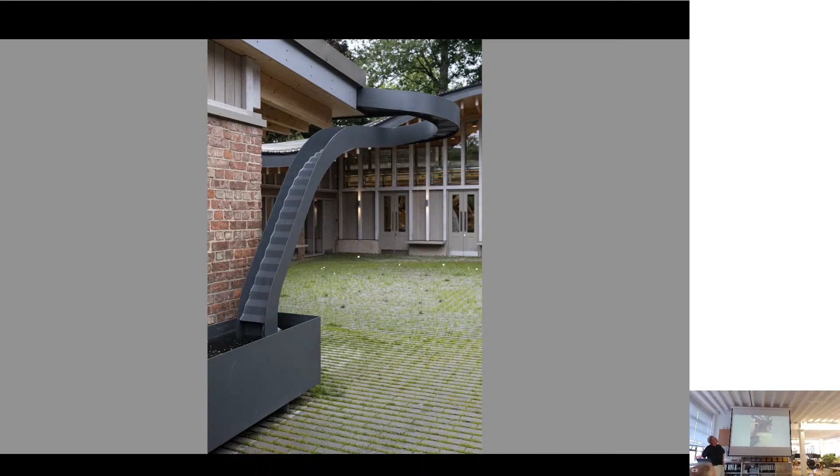And then in terms of the rainwater goods, of course cathedrals have gargoyles, and we felt the rainwater goods here had to be a story about the celebration of rain, because we talk about light a lot, but for us it's always more than just light, it's also about the other elements as well. And so our chalet structures taught us a lot about tailoring, so this was made incredibly cost effectively by one piece of steel that's just folded to make a shape and then has sides that are tailored and fitted onto it, so it gives you a spout that goes on underneath itself. And apparently when it rains they'll come and watch that.

And then the apertures. Last night in the Le Corbusier lecture I showed La Tourette, and if you have to see one building where the apertures are the most amazing on earth, that's probably it. But here what we try to do is every aperture just has to do the job it's meant to do. So the apertures towards the back lift up to get north light into the studio, and the ones underneath them drop down into the wall to let the sound out, but also to put cool air on the face of the masons, because having cool air when you're covered with dust is important.

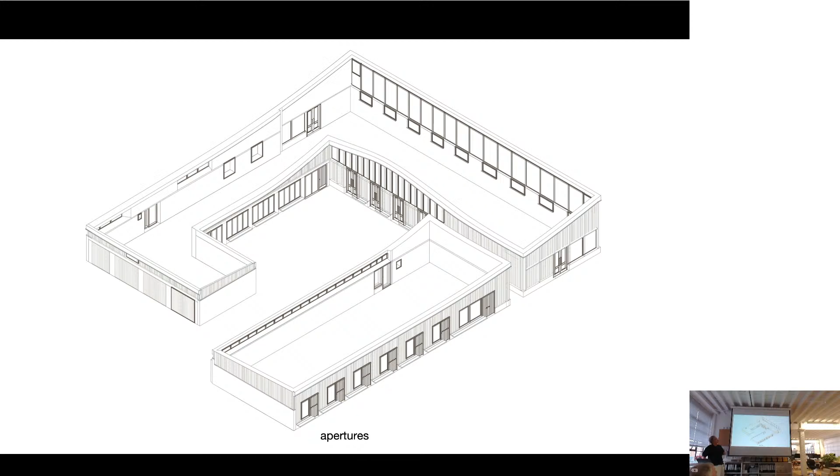So the rooms, even though they're small and cell-like, they're slightly bigger than Carthusian cells, but they are slightly based on Mount Grace Priory, where the garden, and eventually we want that to be planted, the shingle garden. So I've tried to show you how breaking a building down into its fundamentals allows you to go into each part of that building and find a story within the building that's a sub-story of the whole.

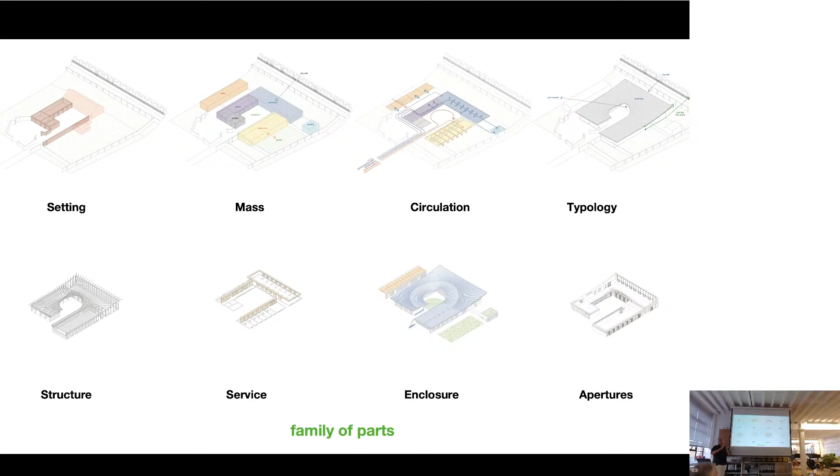And if you think about a story, any film, you have a series of characters, and each character has an agenda. Each character has a role to play, and in a good film, each character will have a very particular role to play. And that's the same in a building.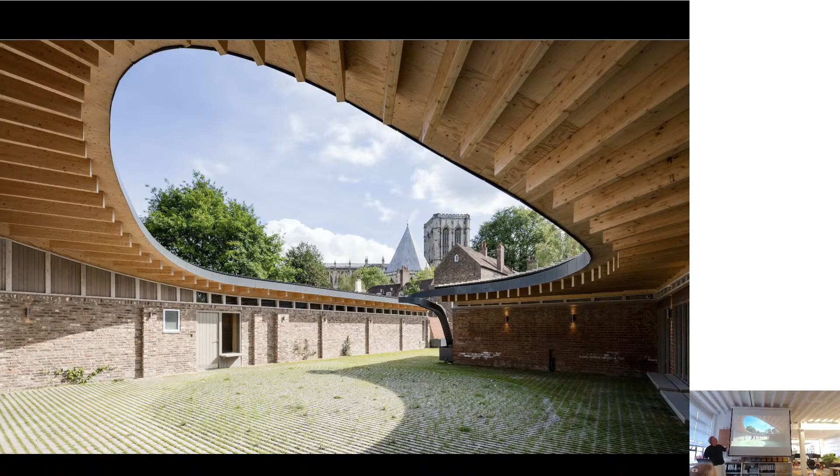And this is where the lapidarium is going to cover the walls. And that's another picture of it at night. That's the admin wing there, and it's surrounded by benches because we wanted it to be a kind of social space. So it's acting like a kind of quad and a cloister. And that's again at night. And there it is during the day, before the greenery came up. And these are David Walensky's pictures we've just got. This is looking back at the cathedral.

So Anna is just going to say a few words to round off. At the end of the book, there's a conclusion and glossary, because we're conscious that we've invented a lot of our own jargon in a way. They range from storytelling techniques to architectural terms like the fundamentals, the family of parts. So there's a glossary and the conclusion, and I think it's worth saying that we've shown with the case studies built work in order to show the whole process: asking, looking, playing, and making.

But we also use the process in competitions that we do, and this was a library and gallery competition we did in Taiwan. The initial asking and looking bit was thinking about these miles of books. They gave us a quantity of books, quite a prosaic brief, and we literally thought, well, what's the ideal? We want to be able to walk from the park into a space where you could see all the books in one glance.

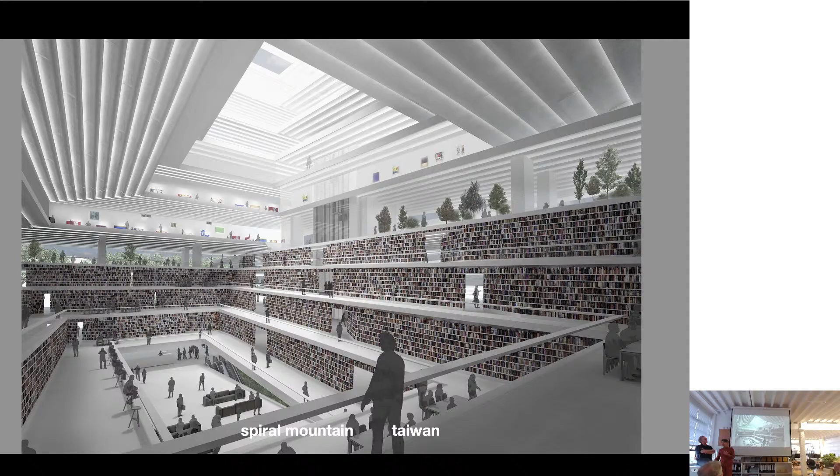So we pursue the ideal, so that's where you enter, and from here you can see all the books, but you also walk through the books to get to the other side, which is facing the park, and that's where you read, and it's nice and bright.

So just to finish, I suppose there are quite a number of ideas in this book, thinking about architecture not as a product but a process, and also why stories and why nature. I think stories are incredibly powerful tools for imagining what doesn't yet exist, and in a nutshell, that's what architects do. We have to somehow take our clients, contractors and consultants into that realm of imagination, and stories are a great way to do that, and to have them input into the story all the way along the journey. I think it's super helpful.

But also nature - personally we are incredibly inspired by nature, but other people might have different sources of inspiration. I think if you drew your stories from nature, you can't go wrong. It's an incredibly powerful quarry of inspiration, and because of our advanced tools, we are understanding nature so much more at a multitude of scales. It's quite mind-boggling and humbling what we're learning about nature - we've only just scratched the surface. So we're entering a new era of knowledge about nature. Secondly, our tools allow us to almost mimic the way nature works through this iterative, adaptive process, whether in design, fabrication, or in systemizing and tailoring parts of our architecture.

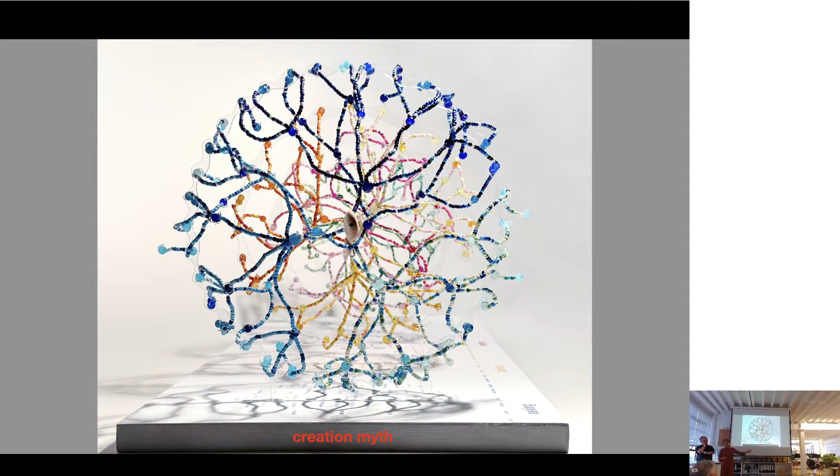So we're going to finish there, with this idea of a creation myth. Each time we get a project, it's an opportunity to find that new creation myth, by tapping into what it is now, what it was before in its origin, and what it could be for the future. Thank you very much.

To see such fantastic work, to hear about processes with such clarity, which then produce buildings of such variety - structures, constructions - and that inquisitiveness again and again, that economy of means again and again. Many of us had seen one of the early ones, but then to see that emerge in the building in York, it's wonderful. I've not seen that before.

Can you explain - was there a moment when the processes became that clear to you? Because obviously the book sets out a way of working which few architects would be able to articulate. Few architects would even risk articulating something, and certainly simply not be able to do it. And yet, 20 or so years into practice together, now it obviously makes complete sense. But was there a kind of moment of epiphany?

I'm not sure there was. It was a very slow epiphany. The truth is, the first book that Mike showed was largely written by him - I helped a little bit. That was when we first met in Hong Kong. So there was a lot of post-rationalization of looking back at what Mike did in Hong Kong, which was working at speed and also working as an outsider, perhaps, which forced him to observe in a very acutely intuitive way, which I thought was interesting, and then having to work economically and so on. So there was a lot of looking back and saying, well, what happened here, and what did they do here.

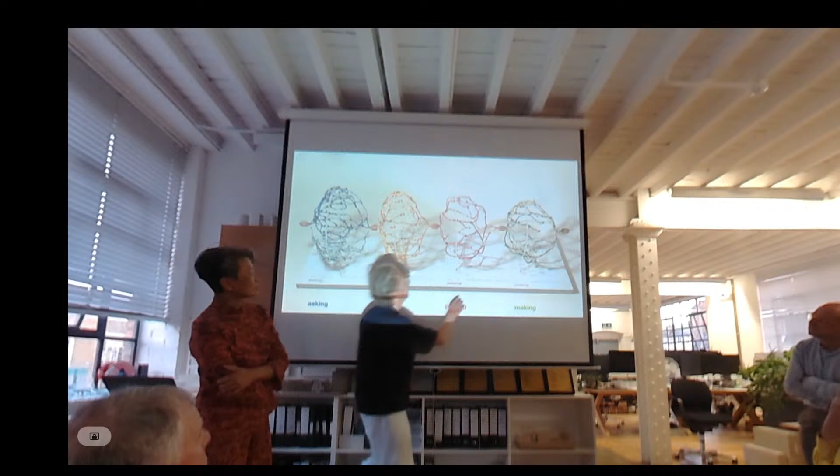It is worth pointing out that somewhere on this diagram here, it says precedents, and what we do is try to find that archetype before we find a precedent, and then once we've found the precedent of, say, a radial building, then we'll go and look for all the radial buildings we can find, and actually we'll know a lot just because we're visiting. Last night was about Le Corbusier, and it was all about what we're learning from him. But actually, we've been travelling together for years, looking at architecture.

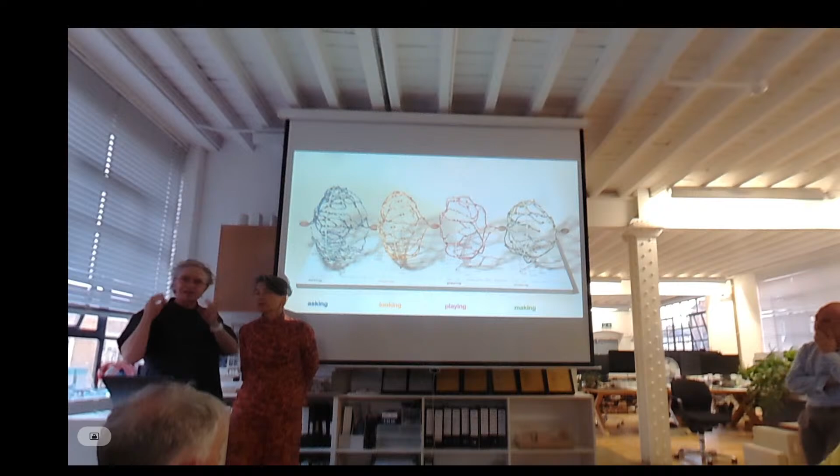So we don't use precedent as the generator. We use precedent as the checker, precedent as the comparison. And then we said in the first book, when you find the precedent that's appropriate, then you have to leapfrog it. And I think AI doesn't yet have architectural knowledge. It can eventually. And AI doesn't have an imagination, so we're safe for a while. It might eventually, but you know.

I just want to say I think it was a lovely talk because it was actually curated and edited so well as a kind of short story of storytelling. So I thought that was great. I wonder, swinging off what you just said, whether it's a methodology that is for you, and the universality in it is for people maybe to take pieces and threads from it about how you tie things together. But a lifetime of practice working out a system of design that you've perfected to help you make your decisions along the journey. That is such a valuable thing.

But I wonder if somebody else could take your methodology. I think they need to reflect and find their own storytelling method. I think they could. We work with a lot of practices to do that, and also a lot of it is about using the stories to engage the client, the consultant, and the contractor believes in the story. And stories are transformative in that way. They are not bogged down in the sort of facts.

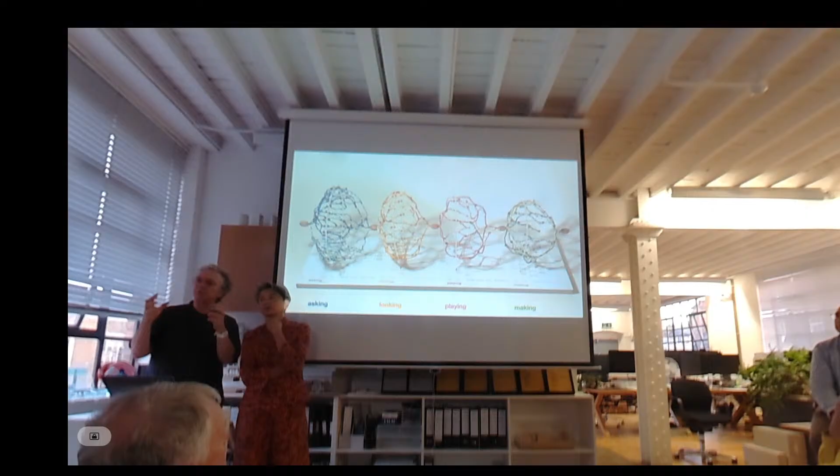We're not really about eclecticism or the amalgamation of things being brought together. A lot of architects, when they scale up, just bring more different typologies into one thing. But actually all of those big competitions we've done are generally just one big idea. I think that's the beauty of the story, because stories have to be clear and have an overarching idea, and obviously things unfold, but it has to have a strong ethos.

So it's more about how you tailor the explorations, the questions and the quests - you keep them relatively narrow, and they expand and contract, rather than expanding the field of inquiry.

Yes, I think so. Also the design alternatives thing - I don't know if that really came across, but we always do 4. I'd tell students, so many would just do 1, and I'd say no, you've got to do 3 more. I'd sit with you till you come up with at least 2 more, and then you've got to come up with a 4th, because if you don't, you're not challenging yourself and you're not challenging the brief. By the time you've got those 4 alternatives, it usually becomes really obvious which one is best.

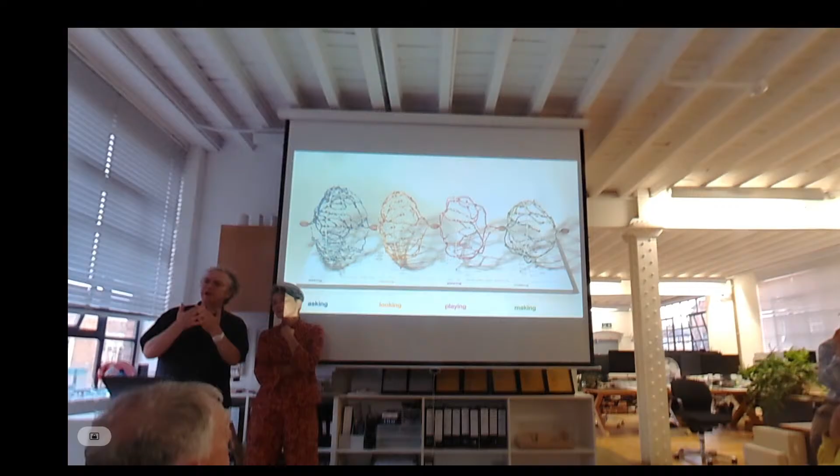That's where the quest thing comes in - it's like a story, there's a conflict and a battle and a resolution. Quite often things amalgamate together to make a really tight diagram, but because we're not into eclecticism, because we're into singularity, that diagram always gets stronger by the addition of things and getting rid of what's not necessary - almost like a distillation, using the story to help you do that.

I always used to say that if you can get on the phone and explain to your grandmother a project on the phone and she gets it, you've won the competition. And send her the postage stamp. Yeah.

Thank you. Well, actually, in your last answer, you touched on it a little bit, because you're talking a lot about storytelling, but you're not talking about it in terms of ideas, but it is actually ideas, and how you actually have good ideas is actually very informed by your process and your analytical thinking about the separate elements. That's what I'm understanding. Yeah. So you could frame it as ideas, but I'm interested that you use the word storytelling, because that's much more imaginative and it pulls people in. Is that why you're more attracted to the idea of storytelling than ideas?

Because it feels, yeah, I think there's a hierarchy. When you have a feeling, that's a notion. When you have an idea, that's a series of notions joined together. When you're drawing a series of ideas together, that's a concept. And when a concept works on many levels, that's a story. So I think a story is a greater thing than an idea. It works on so many more levels, right?

Yes. Sorry, it's a very small one, but I really love the fact that you bring in all the senses, and that for me is inspirational, because I've always been very frustrated as an architect, because quite often people neglect to think about sound, the beauty of the sound, the stonemasons, etc., the wind, and bringing this to life. I think it is actually something that you can capture with a story, which you don't get with a film, because a film is purely visual. You can suggest it through the imagery. You can actually feel the sensations, which is something I feel very powerful in architecture, and I'm delighted that you capture it so well.

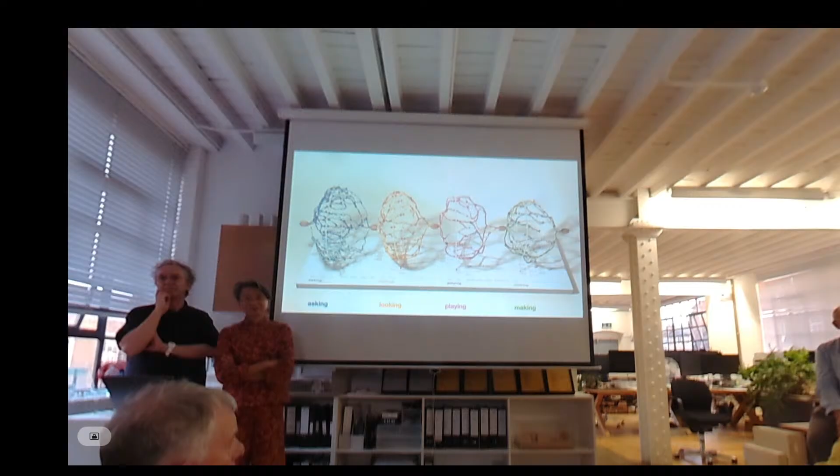Okay, well, that's hardly a question.

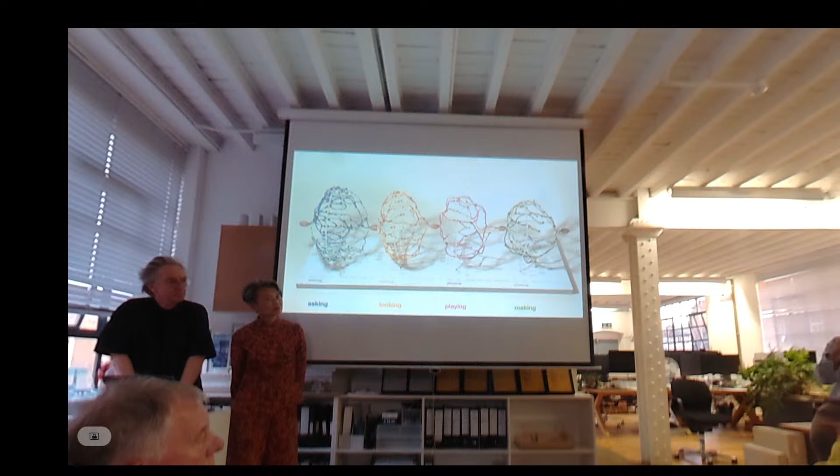Anna, Mike, thank you so much. There's two things. Many people in this room have taught, and one of the things that obviously you see is students starting at the beginning and trying to get to the end really quick, not knowing how on earth to get from one to the other, and so the idea of iteration is something which is difficult to gain confidence in, and your methodology gives people something to breathe into. It seems like an incredibly valuable teaching tool.

The other thing, you said earlier that young architects say, oh, that doesn't sound very professional or whatever. I think this is an exemplary example of practice or praxis, the idea of taking theory and turning it into practice, the application of practical knowledge. And there is both uniqueness and consistency. There's a consistency of thinking and a uniqueness of things that come from it. So thank you very much for sharing that.